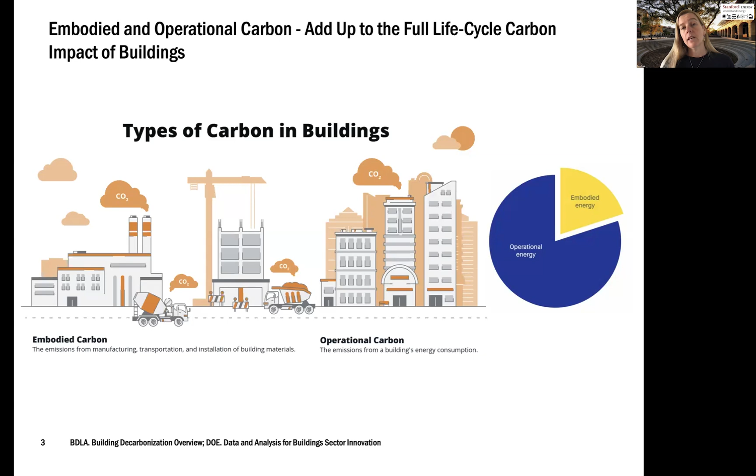About 40% of global energy-related carbon emissions come from buildings. And a lot of that is coming from heat requirements in buildings. And that's heating for space heating, heating for water heating, heating for other things like cooking. So the heat requirements in our buildings is a big piece of the carbon emissions from our buildings in the operational part. And then there's obviously the embodied carbon parts, which are the materials like the steel and concrete and things that we use in our buildings.

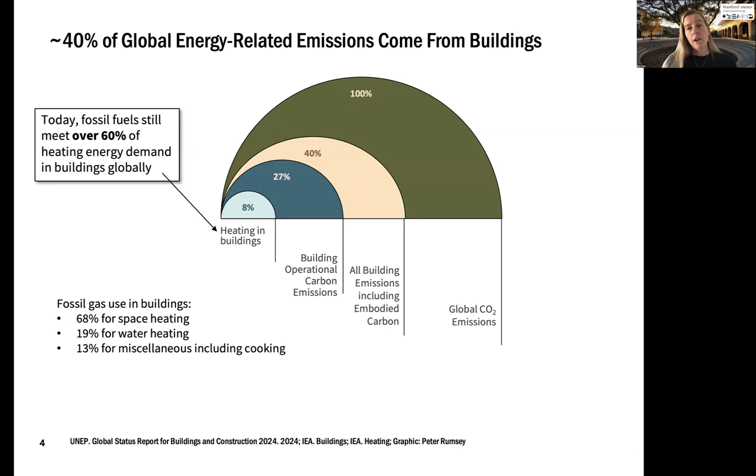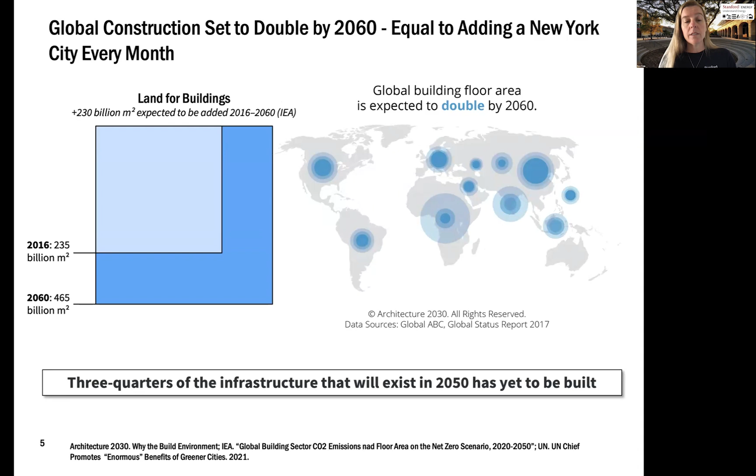So we're still heavily reliant on fossil fuels, particularly natural gas, for meeting these energy needs within the buildings, in particular the heating bill in the buildings. And there's no slowdown in terms of our built environment happening. Global construction is set to double by 2060. And so we have a lot of buildings that are going in and buildings that are planned. And so that infrastructure is expected to continue to grow to meet growing demand for buildings.

So if we're thinking about our building and trying to make it greener, the first thing we want to talk about is the envelope of the building and that embodied carbon. Yes, that embodied energy is less than a quarter of the overall life, but it still matters and it's still significant given how many buildings and how much building we do in the world. And so one of the things you can think about is what am I going to make my building out of? So concrete tends to be a very high embodied carbon material.

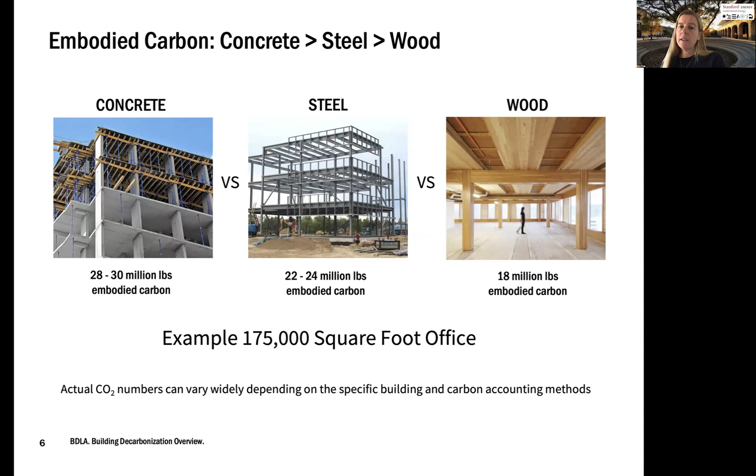Steel is the next most common material for our buildings, and especially for our big commercial buildings. Again, a pretty carbon intensive material, depending how you're making that steel. More and more, I would say for green buildings, wood is actually being looked at because it has a lower embodied carbon, depending on a lot of factors on where you get that wood, but you're actually storing carbon by putting that in the building if you're getting it responsibly sourced or sustainably sourced.

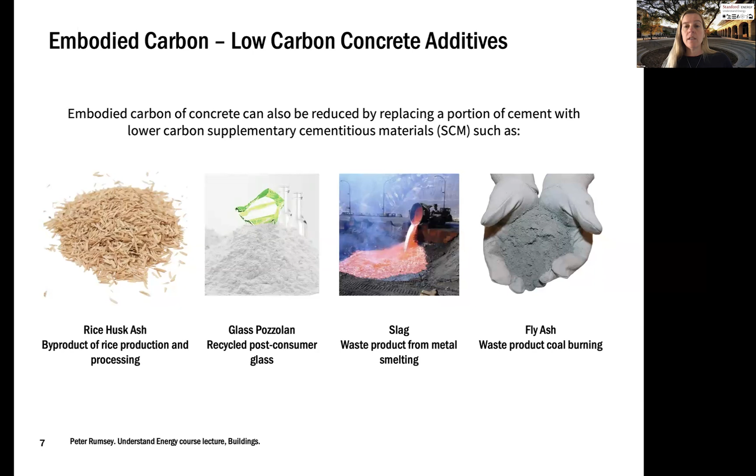And there's a lot of innovations going on to try to make these materials more carbon friendly or lower carbon or maybe even zero carbon. And so there are ways, for example, that they're looking at changing the additives to concrete to lower the carbon intensity of concrete. I would say these are pretty early stages. They're not implemented broadly, but if we have the right incentives and policies, these things could really take off and have an impact on our built environment.

Let's talk about operational carbon. So if you were thinking about, okay, I want to make my building as green as possible, you would take the typical building. First, you would make it as efficient as possible. So you're lowering the energy needs in order to get the services you want. A lot of times these efficient buildings actually are also spaces that are more enjoyable to be in because they use a lot of natural lighting.

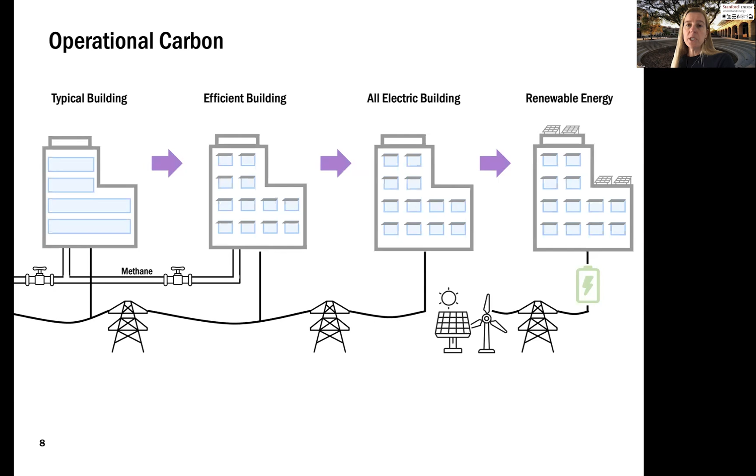Then you want to electrify your building. What you're doing there by electrification, those are additional efficiency measures, and you're taking air pollution sources out of your building. So when you're heating your water or your spaces with natural gas, you have air pollution actually in the building or being vented near the building where people are. And then once you've electrified it, you have a lot of zero carbon options, including on-site or off-site renewable energy to provide those services.

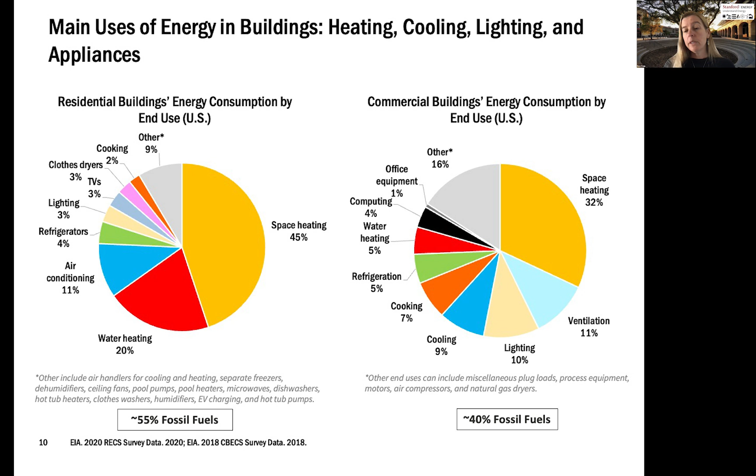To give you a sense of what services we are using in our buildings and what dominates, space heating is the biggest one. In some places, air conditioning might dominate, but if you're looking at average overall, these are numbers for the United States, but it would vary a lot globally. But in the United States, it's really the space heating and cooling that are big pieces of both residential and commercial. And then you have things like water heating, ventilation, lighting, other services that we're providing. And you can see that the majority of this is still provided by fossil fuels. And in commercial buildings, about 40% of those services are provided by fossil fuels.

And I don't want to forget that it's very different in terms of this operational energy and how it impacts households. And so, one of the big benefits of providing those services more efficiently, especially for low-income households, is that they already are bearing a pretty high energy burden on their household spending.

In other words, a lot of times low-income housing tends to be more inefficient, both for the building and the space heating and the comfort, but also for the appliances and other things that they're using in their homes. And that leads to higher energy intensity for those services, and an outsized portion of their household budget goes to those energy services. And so electrification, building envelope, these kind of weatherization programs are really important, especially for our low-income households, to really try to address this energy burden.

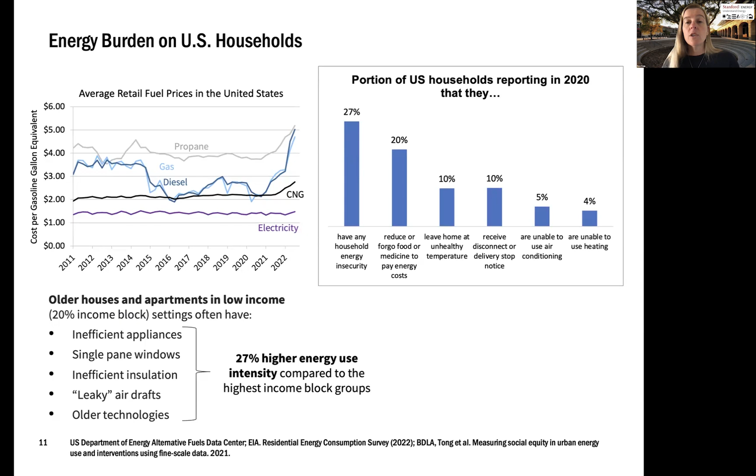So where do we look for efficiency in buildings? We usually start with orientation of the building. You want north facing in places that are hot climates. You don't want a lot of windows on the south side. That's where you're going to get a lot of your heat loading. So orientation of the building, you look at all sorts of innovations on the envelope, high performance windows, insulation. A lot of these things can really lead to lower costs where you're lowering the sizing of your heating and cooling systems because you're putting that effort into the orientation and the insulation of the building.

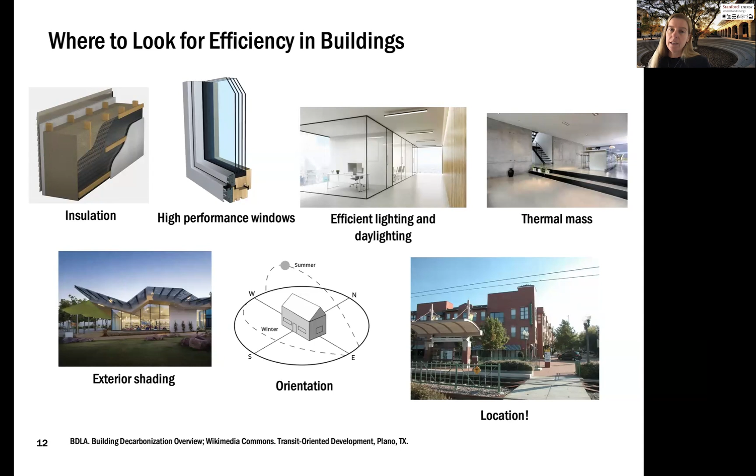And I also like to talk about how buildings are part of our communities, are part of our cities. They're not in isolation. So the location of the building can actually matter a lot when you're thinking about the holistic carbon intensity. So taking a net zero building that's beautiful and putting it out in the middle of nowhere and everybody has to drive there in order to go to work, that's not great when you're thinking about the whole system. So one of the things that we can think about is putting our workplaces or our homes along public transit corridors, for example, and really having the whole system in mind when you're thinking about having a net zero or a low carbon building.

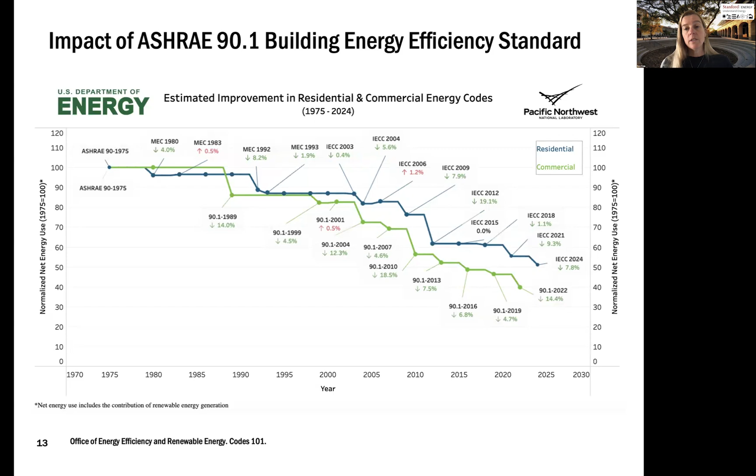Building efficiency standards, and some of these have been codes and some of these have been guidelines, can really drive the efficiency of our buildings. And we've seen that success with some of the ASHRAE energy efficiency standards and how they get adopted into building codes. So I wanted to talk specifically about electrifying the building, but just looking at our space heating services, a lot of places are heated by natural gas furnaces. Those can be 80 to 90% efficient. Sounds really great, but you do have that source of carbon emissions and air pollution at your home.

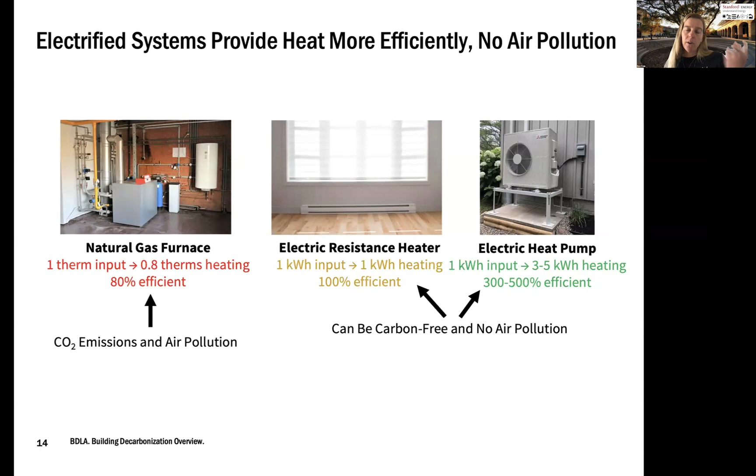Other ways to heat a space: electric resistance heaters. This was popular in a lot of places in the Northeast, especially in buildings built in the 70s, for example. That's actually 100% efficient. 100% of the electricity you're putting in there is coming out as heat. We can do that very efficiently. But what's even more efficient is a heat pump. And you've probably heard about heat pumps now. Europe has done a lot to boost how many heat pumps they're putting in to try to reduce their dependence on natural gas. Heat pumps are even more efficient than 100%. They're 300 to 500% efficient. What that means is that for the electricity you're putting in, you're getting even more heat service out. And heat pumps do this because you're moving heat rather than creating it.

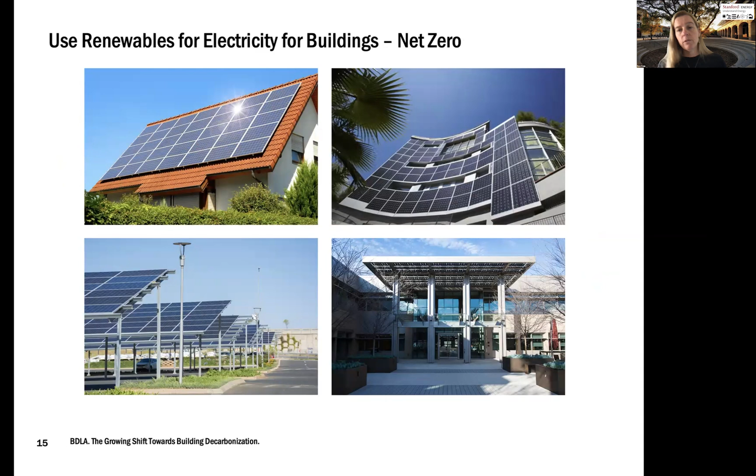And then if we want to make our building net zero, we have to think about providing that electricity with carbon-free resources. And then finally, I don't want to be remiss in talking about batteries, because batteries can be a really important way to actually save money on a net zero building. So batteries do a few things for you at the commercial scale or at the residential scale. For the commercial scale, it's peak load management. Commercial entities are often charged something called a demand charge, which is their monthly peak load during each month. So on top of the amount of energy they use, for their peak power that they draw, they have to pay a demand charge. And those can be pretty high because the utility has to provide enough resources to meet that high peak every month, whatever that is. And so that's how commercial is paying for that peak.

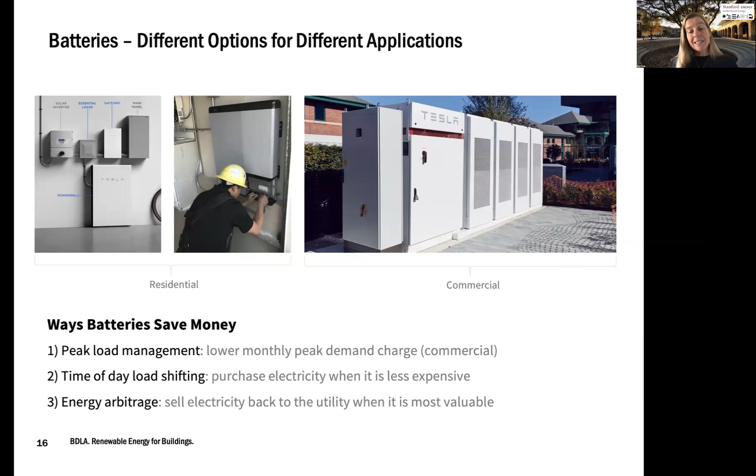Batteries can allow them to really shave off that demand charge, because batteries can then be used to provide some of the energy during those peak times and really lower that peak monthly demand charge, and can be really beneficial for commercial entities. And then for both residential and commercial, batteries are really great for shifting when you're charging and when you're discharging those batteries in terms of what are the costs of the electricity. So they allow you to purchase electricity when it's less expensive if you have time of use rates, and then sell it back to the utility when it's most valuable.

Okay, I hope that gave you some ideas on how we can decarbonize our buildings.